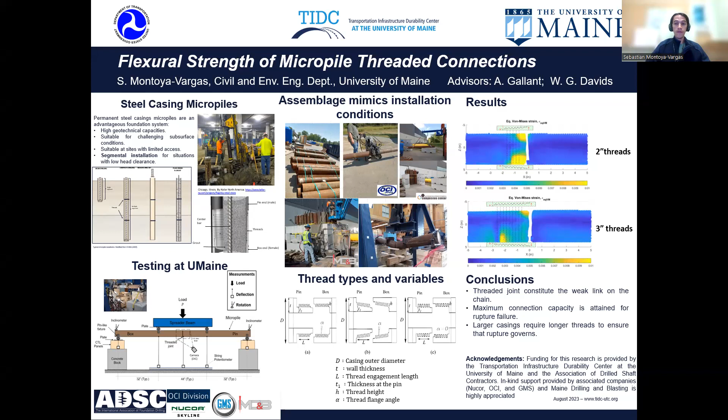My name is Sebastián Montoya. I'm a graduate student at the Civil and Environmental Engineering Department at the University of Maine, working with professors Aaron Gallant and Bill Davids. Today I'm going to talk about some of the results that I got during my PhD, whose main focus is on flexural strength of micropile thread connections.

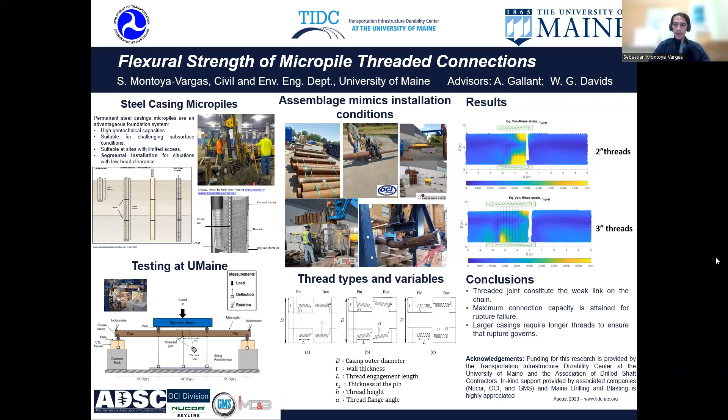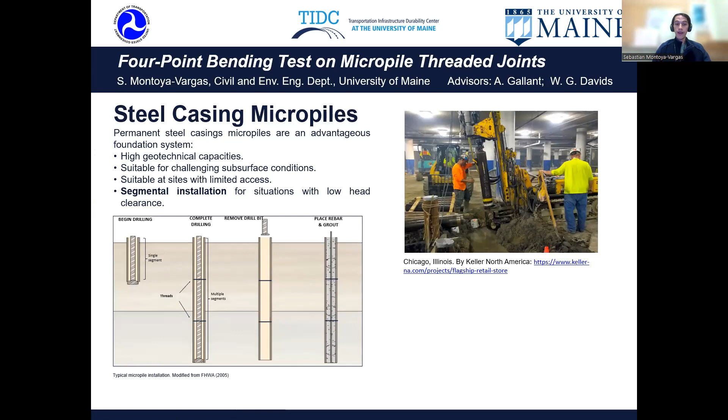So to start with, we are going to focus on one particular kind of micropiles that have permanent steel casings. This kind of micropiles can develop high geotechnical capacities, tension and compression, that are suitable for challenging subsurface conditions, at sites with limited access and in situations with low head clearance. The way micropiles are installed is by taking segmental pieces of the steel casing, typically 5 foot long, drilling them into the soil and connecting one piece with the next to achieve the desired depths.

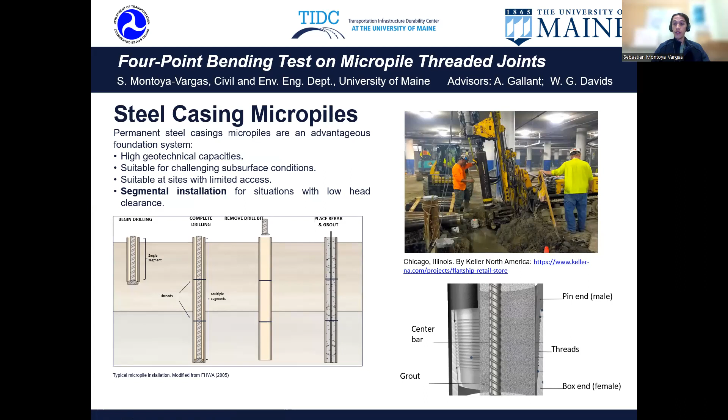The connection is made by means of a thread connection. A thread detail is machined into the end of the casing, one end being a pin or male end, and the other a box or female end. Typically, these micropiles are filled with grout, and in most cases they incorporate a center rebar. The picture on the top right is provided by Keller North America and shows the installation of this kind of micropiles in the basement of a building, so you can get an idea of how small they are and the size of the equipment they need.

What we do is take one of these micropiles, which is composed of 2 segments, one with a box end and the other with a pin end, threaded together by a thread joint in the middle, and then we subject them to bending, increasing the load until failure of the joint takes place. Measurements we take are displacements at 5 different points, the supports, the loading points, and the midspan, done with string potentiometers; rotations at the ends of the micropile by means of inclinometers; load by means of a load cell; and detailed strain fields in the neighborhood of the thread joint using digital image correlation.

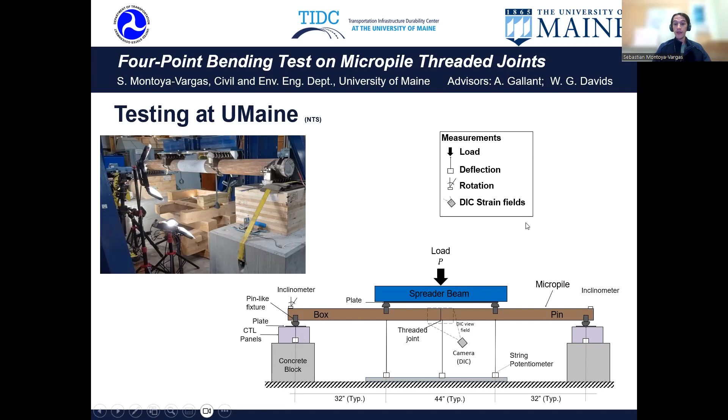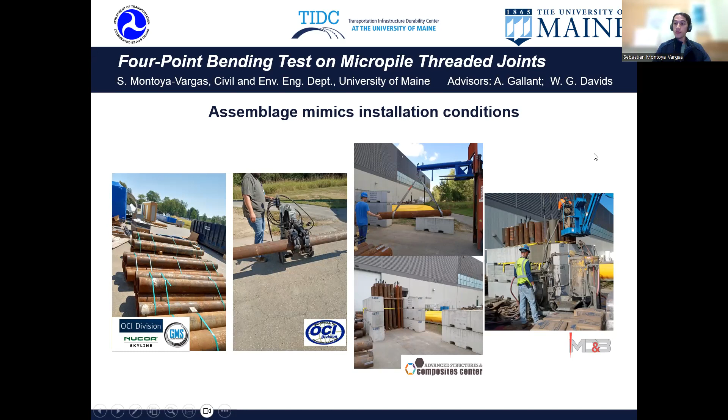Before we can go into the test, we have to assemble these micropile elements, and to do that, we try to mimic the installation conditions in the field. We receive the steel casings at our facilities in the Advanced Structures and Composites Center. Again, these are composed of 2 pieces that thread together. They come hand tight from the production plant, and at the university we use a hydraulic wrench to apply extra torque and make sure this connection is really tight, while trying to represent the torques they are subjected to when being drilled into the soil. Then we stand all the micropiles up vertically so that we can provide gravity grouting, similar to how they are filled with grout in the field. And for some of those micropiles, we introduce a center rebar.

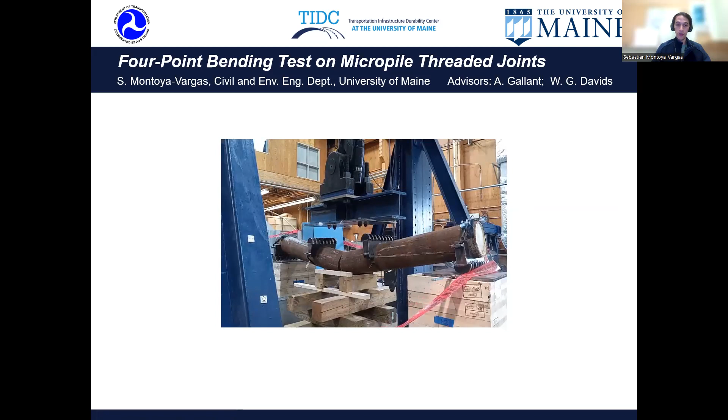This is a video of the actual test. It's showing us the load progress. We cannot effectively see the deformations, but we can see very soon how failure takes place right at the joint. So the focus of this study is to understand how different thread details impact the overall connection strength and the kind of failures that we are attaining.

So for that, we had played with different parameters: the casing diameter, the wall thickness, different thread lengths, wall thickness at the pin, thread heights, and thread shapes as given by their thread flank angle. That allowed us to cluster our different micropiles into three different kinds of connections.

A connection type A, where we have a straight wall and a V-like or trapezoidal shaped thread, as shown on the right. Then we have type B, which is the same kind of thread, but now we introduce a tapered wall that is thicker towards the beginning of the connection and thinner at the end. Or type C, where we have again a straight wall, but in this case we use square threads.

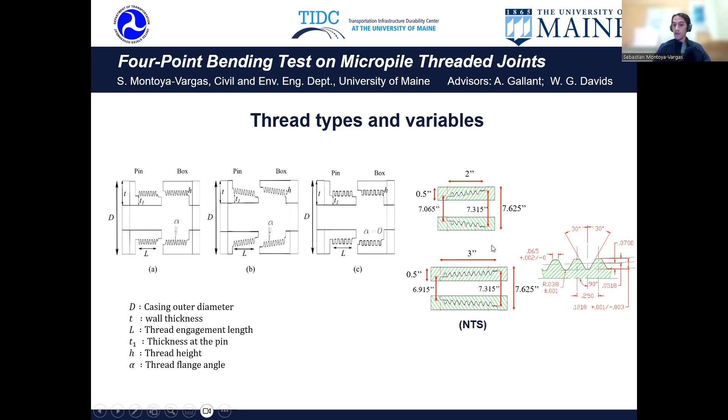Because of time limitations, we are going to discuss today results on threads type B that have 7 5/8 inch outer diameter, and we are going to work with two different thread lengths: short threads of 2 inches nominal thread connection, that's the distance from shoulder to shoulder of the connection, and 3 inches, that will be your long threads. So for the short threads, the most insightful measurements come from the DIC strain field.

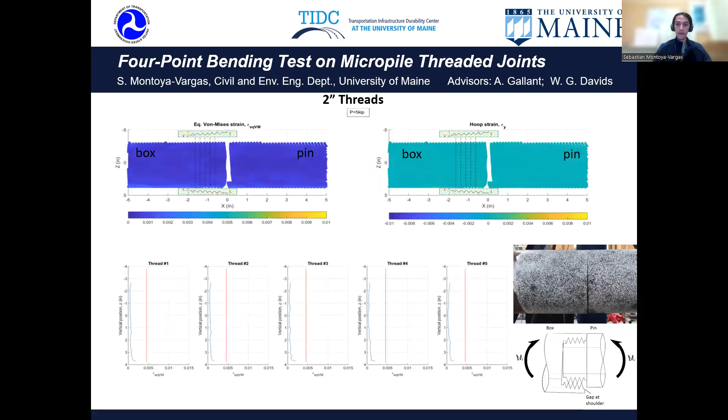This depicts essentially two big differences, just introduced by changing the thread length. If we pay attention to the failure load on the short threads, we attain failure at about 93 kips. For the long threads, we have failure at roughly 130 kips. That means that to gain full capacity, to take full advantage of our material in the connection, we have to make our threads longer and hopefully attain rupture. The takeaway message: longer threads, more capacity.